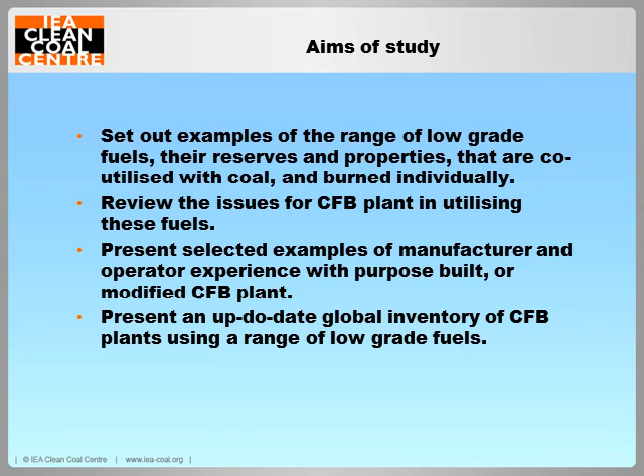So the first question to ask ourselves is, what are these low-grade fuels? Generally speaking, they're characterised by having a recoverable energy content, but one which is lower than the range expressed in the normal fossil fuels, oil, gas and coal. Additionally, they may be very high in inert materials, principally mineral matter and moisture, and this in many cases accounts for their very low as-fired recoverable energy content. Finally, they may have high concentrations of pollutant precursors. Sulphur is a particularly good example of this, but I'd also cite things like vanadium in petroleum coke by way of example.

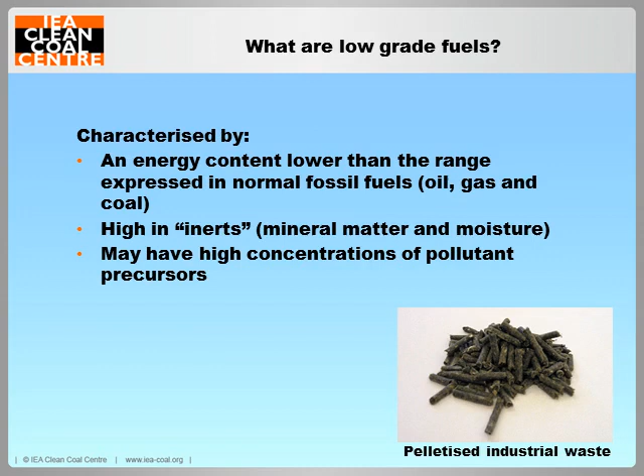So, what are the attractions of low-grade fuels? Primarily financial. They're a resource with recoverable energy. They're available at a relatively low cost. They have an attraction for co-firing with coal, for example, when the price of coal is particularly high, decreasing the overall costs of plant operation. Secondly, certain of these low-grade fuels may reduce emissions when co-fired with coal. This is particularly true of biomass and biomass-derived materials like waste wood, which being CO2 neutral can contribute to reduction in CO2 emissions from a coal-fired plant.

Thirdly, they may be considered as waste materials in their own right, and very often, as a consequence of national taxation policies, these materials can have very high disposal cost. If these materials are used for energy recovery, this cost can be at the very least offset, or in some cases eliminated, by using that waste for energy generation. And finally, they may be useful in clean-up activities. For example, where old coal workings and spoil heaps are being cleaned up. If the material can be used for energy generation, this can contribute positively to the economics of the activity.

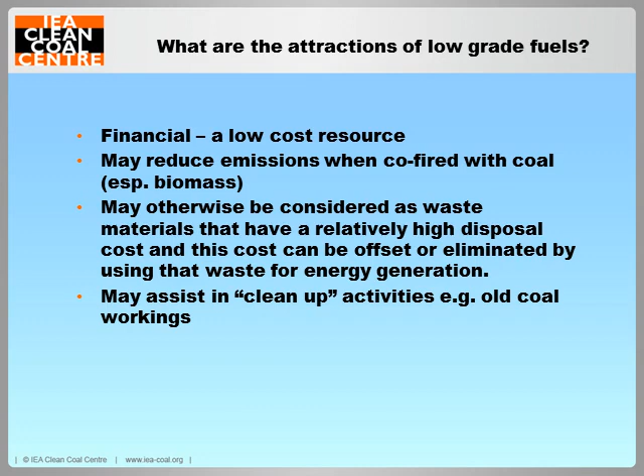Now, this slide just gives a flavour of the very wide range of low-grade fuels that have been evaluated for energy production. They're grouped under these 5 headings: agricultural waste and biomass, industrial waste, municipal waste, wood waste and fossil fuel wastes. The materials range from fairly well-known ones like agricultural waste and biomass, through to quite esoteric ones that arise in very small quantities. But nevertheless, if the producer of the waste can realise monies from their use, this can be very beneficial to the business activity.

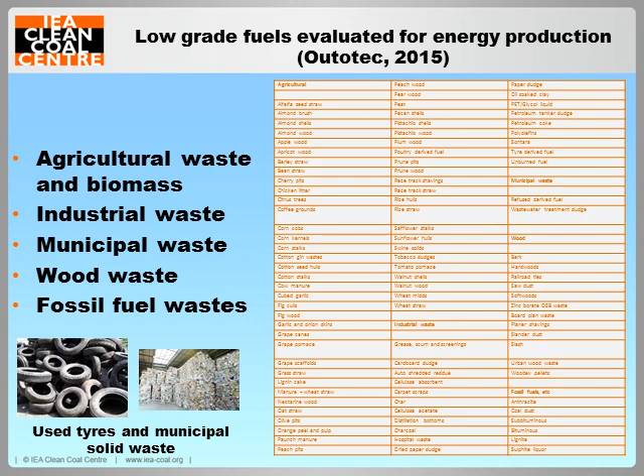Now, in the study, we reviewed the global reserves or annual arisings of these low-grade fuels under these 13 headings: biomass, peat, oil shale, lignite and brown coals, oil sands, coal mill rejects, coal washery rejects, petroleum coke, wood and fibre residue, refuse-derived fuel, plastics, sewage sludge, and high chlorine and high sulphur coals, the latter sometimes being known under the name of battle coals. Now, in some cases, the arisings of these materials can be very significant. For example, I'd cite petroleum coke or pet coke, where production is currently around 170 million tonnes per annum. And in the case of coal washery rejects, recent studies have estimated that up to 60 gigatons are available worldwide. So a very significant resource.

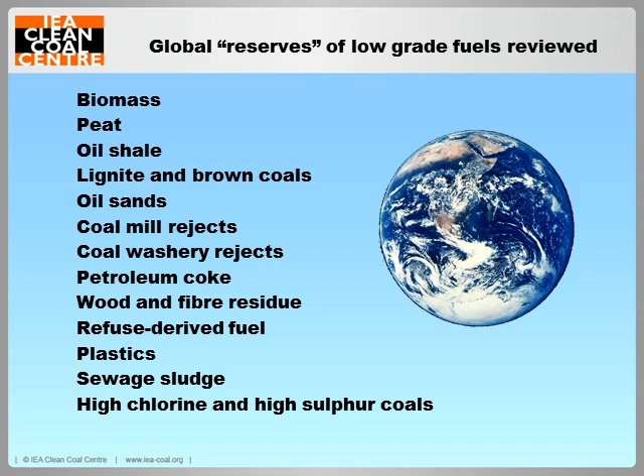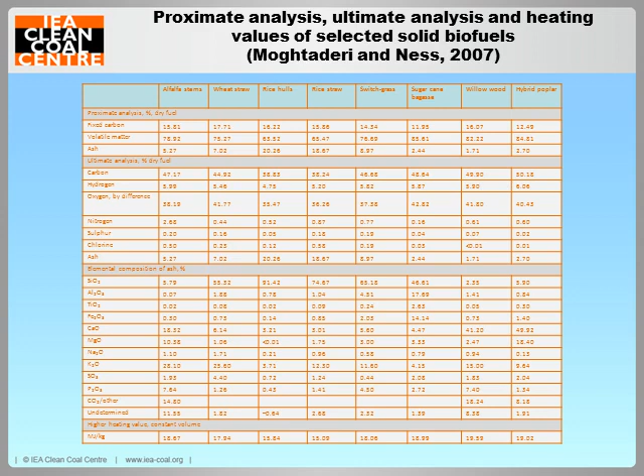Now, this slide just gives a feel for the wide variation in properties within just one category. This lists several types of biomass, and if you just look across the different materials, you can see, for example, that the ash content can vary quite significantly. But of particular importance, the elemental composition can vary very significantly. And this can have implications for plant operation in respect of fouling and slagging issues. Some of the materials are very high in the alkali metals, some 20% there, whereas others are relatively low, and in some cases more coal-like.

Solid fuel or mixture of fuels, along in most cases with limestone for sulphur capture, is introduced into a very large water tube boiler. Now, this contains a bed of inert material which is fluidised by preheated air, and it's in this space that the fuel burns and releases heat to the water tube walls.

The fluidising velocity in the CFBC boilers is sufficient to actually entrain the bed and burning fuel and carry it out of the main boiler, where it's captured by a number of devices, finally a system of cyclones, and then returned to the bed via a separate leg. Hence the circulating aspect of the technology.

Heat is recovered in the usual way with reheat and economizer sections. Steam is used to drive a steam turbine and hence a generator for power production. Heat is further recovered in the air preheater to pre-warm the fluidising air. And finally, on the back end, systems of pollution control can be installed for very low emissions.

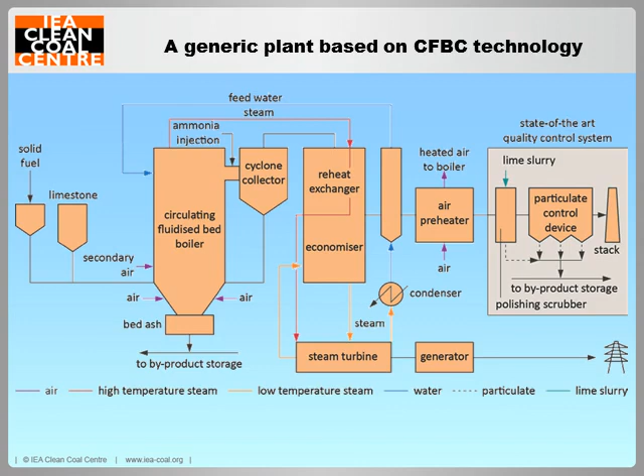Now, CFBC is particularly suited for low-grade fuels for a number of reasons. The large inert bed provides a sort of a heat sink for operation, and this allows it to accommodate a wide range of fuel properties. Building on that, it's possible to change fuels sometimes quite significantly with respect to properties online with minimum disruption to the process.

CFBCs operate typically at 800-850, and this lower combustion temperature reduces the potential problems from fouling and slagging, which can be associated with certain materials. And the low temperatures and the long residence times facilitate emissions control. This is particularly true in the case of sulphur capture with limestone.

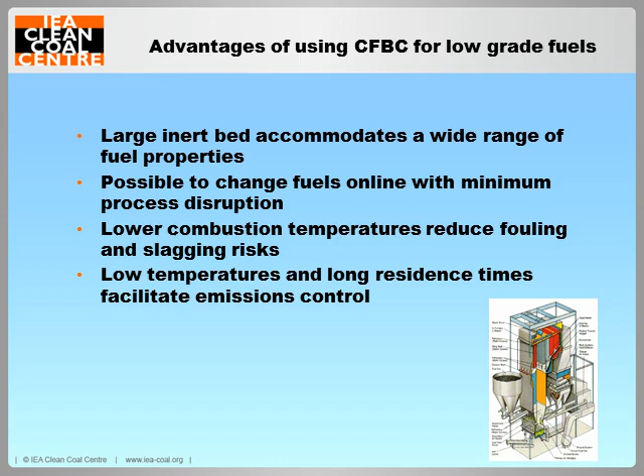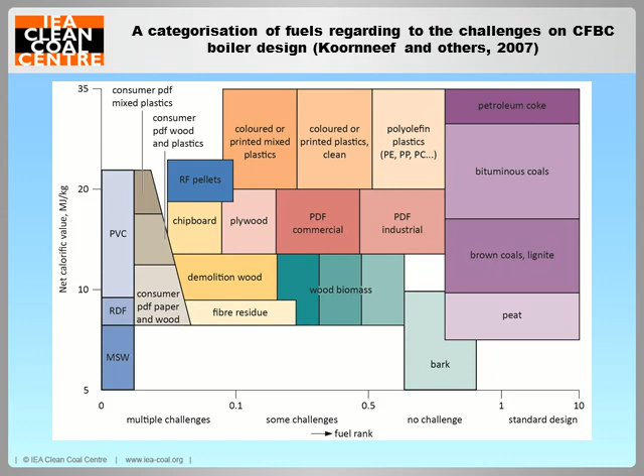Right, just to look at some of the individual challenges from fuels. I mentioned earlier that these fuels can be quite high in moisture, although having said that, the fuel moisture content is generally, unless it's particularly high, not an issue for CFBC utilisation. That's just as well because it can vary quite significantly from a coal, for example, of good quality, having a moisture content between 6 and 7%, going up to certain biomasses which can feature up to 60% moisture. When you reach these highest levels of moisture, it's customary to use a support fuel, which could be coal, gas or oil, to support combustion.

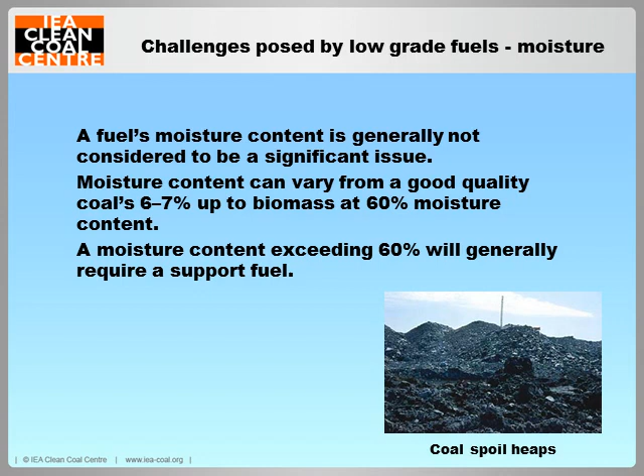The heating value of the fuels can vary very widely, and is almost always linked with the mineral matter and moisture content of the fuel as fired. As we saw previously, high moisture biomass can have an energy content as low as 6.5 megajoules per kilogram as fired, whereas something like petroleum coke can be as high as 32 megajoules per kilogram, which is really sort of comparable or exceeds good quality coal.

When we look at the waste coals, coal washing residues, these can have very low energy contents, as low as 4.5 megajoules per kilogram. But the moisture content is correspondingly low, and the reason for the low heating value is really the dilution by the high mineral matter content.

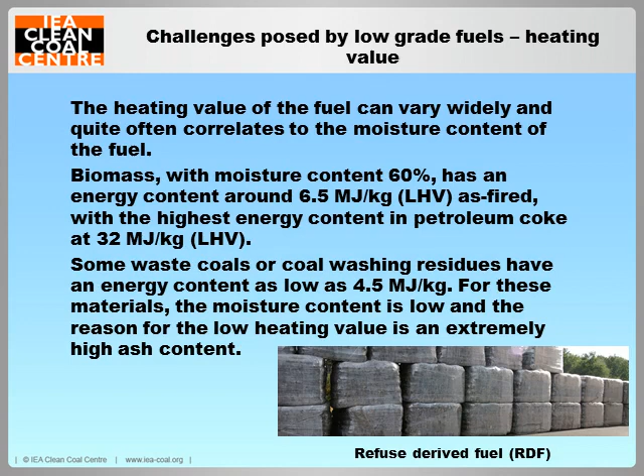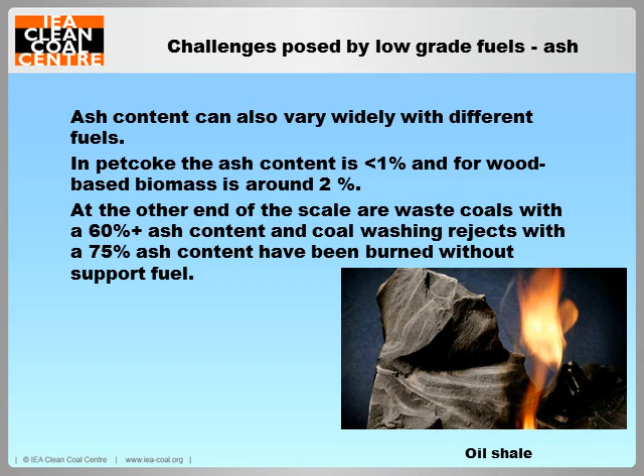The mineral matter or ash content can vary widely, going from a good example, petroleum coke, pet coke. The ash content is typically less than 1%. Wood-based biomass, also very low ash, about 2%. But as we saw earlier, the waste coals can have very high ash content, 60-75%. But because the moisture content tends to be relatively low on these, they can still be burned without support fuel.

Sulphur and chlorine contents can be an issue in these materials, and again, wood-based biomass, very low sulphur content, but pet coke can contain 6-8% sulphur, and as we'll see later, some of the poor quality lignites can have sulphur contents of as high as 13%, which pose specific issues.

Chlorine content is also an issue. This can arise in certain coal-derived materials, but the greatest challenges are provided in the refuse-derived and municipal solid waste-derived materials, where the chlorine content can frequently exceed 1%, with implications for deposition and corrosion.

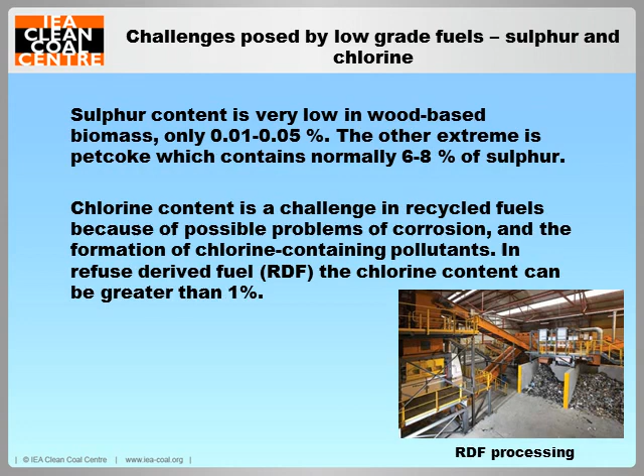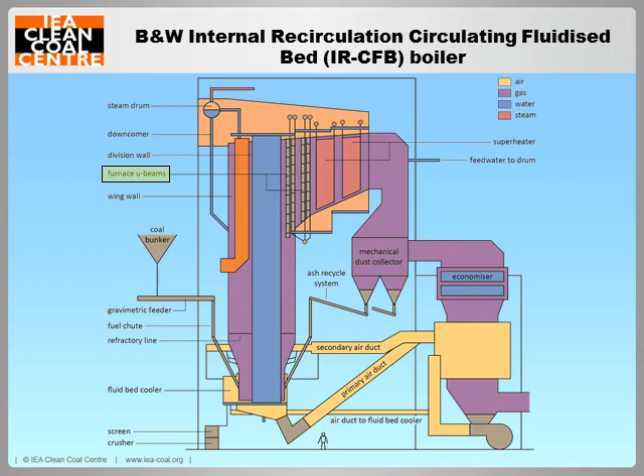Now, the boilers are noted for having a two-stage solid separator. This is the process by which the bed material, which is circulating, is captured and returned to the main boiler. And the primary mechanism for this is through impaction on a series of devices known as U-beams, which are located at the furnace exit. And these collect the bulk of the solids, 95 to 97%, and they are then returned to the furnace by gravity. Material which escapes the U-beam collection passes into a multi-cyclone dust collector in the lower temperature region of the boiler, and here the remaining ash is collected and again returned to the main boiler.

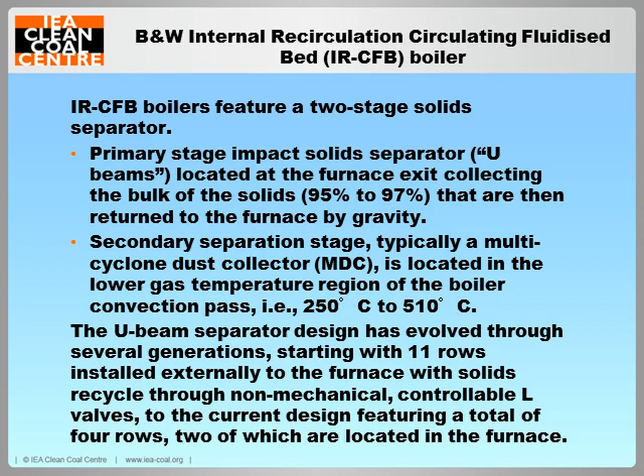Now, B&W's experience on the range of fuels has resulted in evolution of the U-beam separator design so that this degree of capture can be achieved efficiently with a range of fuels with additional benefits to furnace operation. If we look on this slide, we have the original generation, which featured, I think it's 11 rows, which were actually outside the main furnace, and an associated solids collection hopper for return of material. Evolution of this design led to the introduction of U-beams actually in the furnace, where material would drop directly back into the bed, but material which passes that is again collected in the hopper. And then further evolution of the design led to the introduction of a sort of dogleg slope on the furnace exit, fewer U-beams, but very efficient collection, returning a very high concentration of bed material back into the furnace.

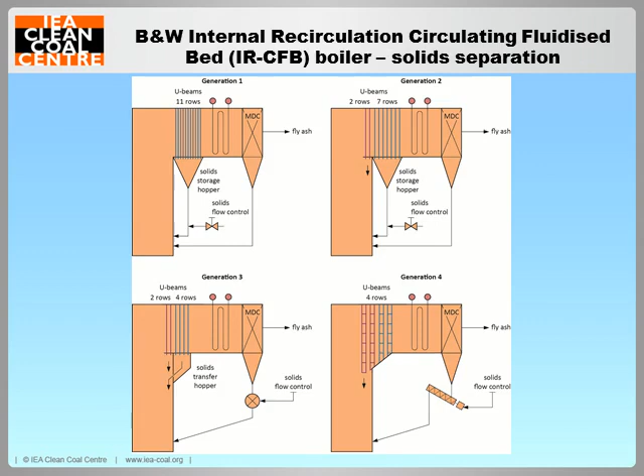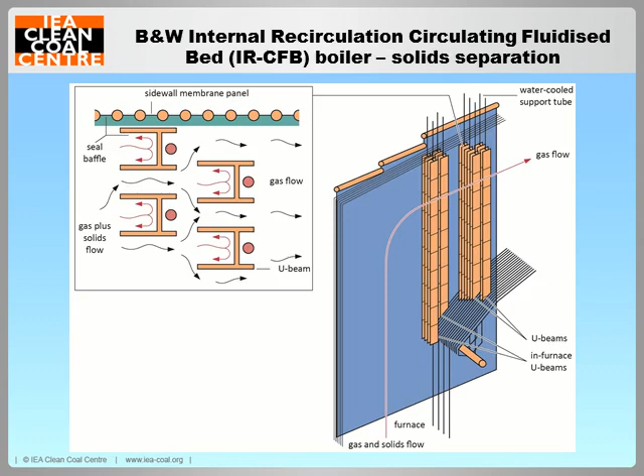This slide shows that process in a little bit more detail, where you can see the structure of the U-beams, where impaction reduces velocity of elutriated material, which then drops down back into the main part of the furnace. We have a set of U-beams actually in the furnace, and the backup second set lying a little way behind that. Another area of improvement has been the minimisation of refractory within the boiler. This has benefits from two standpoints. If the refractory is minimised, then the warm-up time of the boiler is reduced, and less refractory means less surface available for the potential growth of deposits, which can impede operation.

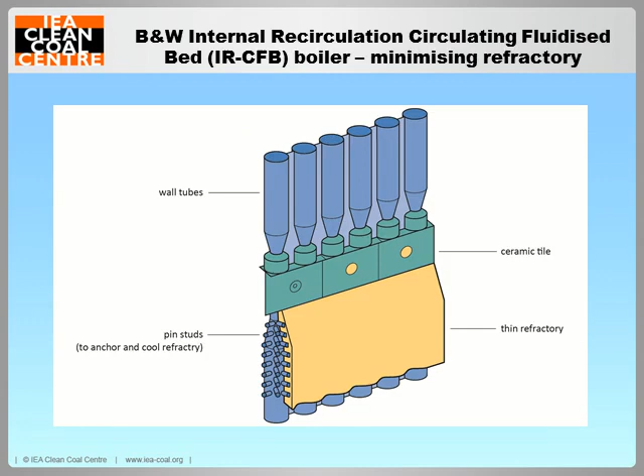So, summarising the lessons learnt from this exercise, the U-beam evolution design gives higher solids collection efficiency, better control of furnace temperature, the auxiliary power requirements were found to reduce, more uniform gas flow throughout the boiler, reliable operation of the solid separation system, and the reduced refractory in the boiler has reduced startup time of the CFB. The CFB operates with a better dynamic load change and has a wide turn-down ratio of about 5:1. And there are several examples of this type of development in the bulk of the study, if you'd like to take a look.

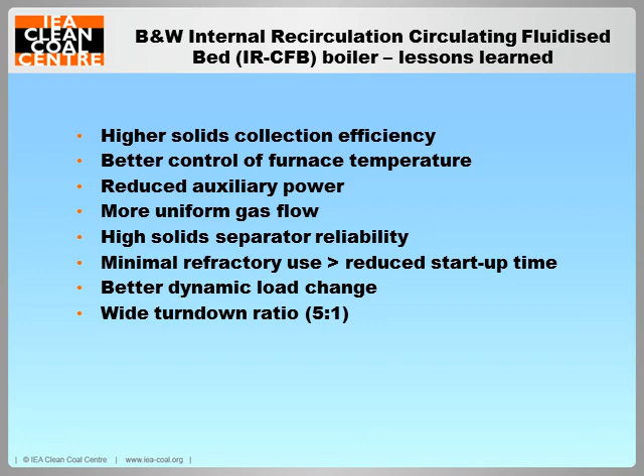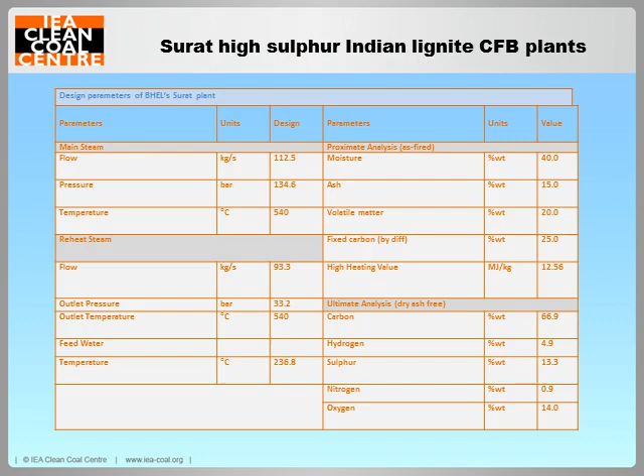Second example, this is a CFB plant which was constructed and commissioned to utilise the Surat high sulphur Indian lignite. This is a particularly difficult fuel which has a high sulphur content of over 13% and requires a significant concentration of limestone for sulphur capture. Now, the operating experience of using this high sulphur lignite in the CFB, two problems really. Ash-related blockages were occurring at the cyclone, particularly at low load, where limestone, which had been calcined, was recarbonating and blocking up the entrance to the multi-cell cyclone system. Additionally, in the boiler back pass, deposition was very rapid, occurring on the water tube walls there, and this was impeding the passage of flue gas, causing back pressure and operational difficulties.

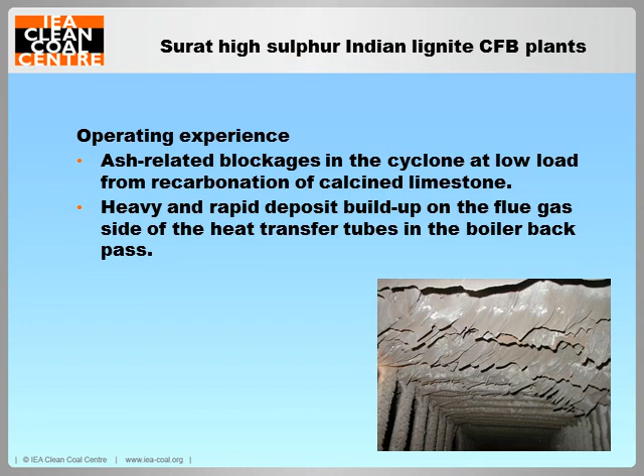To tackle the cyclone deposits, a program of work was initiated by the operators, checking the limestone feed size continuously with additional sampling, and optimizing the feeder size by fitting blanking plates to certain of the feed cells to make sure that the flow is consistent. The operating procedure of the plant was revised to maintain the higher combustor temperatures before commencing limestone addition to try and minimize this effect. And finally, the incorporation of an air pulsing system at the junction of the cyclone and standpipe was found to be effective, disturbing the deposits at a very early stage.

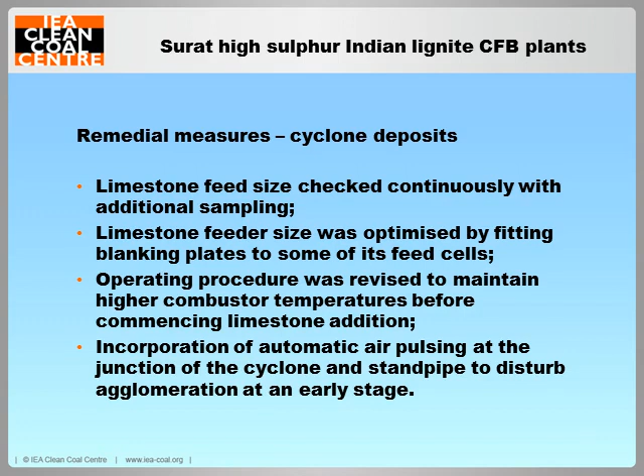For the backpass deposits, a series of investigations using probes determined the rate and location of build-up, and a series of high-pressure soot blowers were introduced into this part of the boiler, and a fluidisation arrangement for smooth removal of ash falling into the ash hoppers to ensure that there wasn't really enough material for deposits to become established. Now, the outcome of both of these measures has been to improve full load operation, and limestone could be added sufficient to achieve a sulphur capture of more than 98%, which is quite impressive considering the very high sulphur content of the lignite fuel.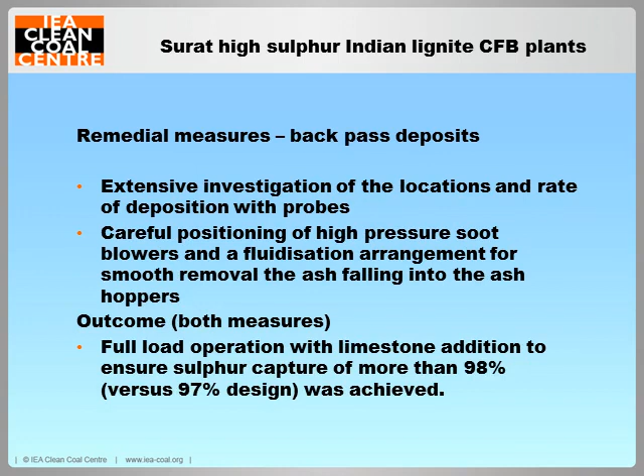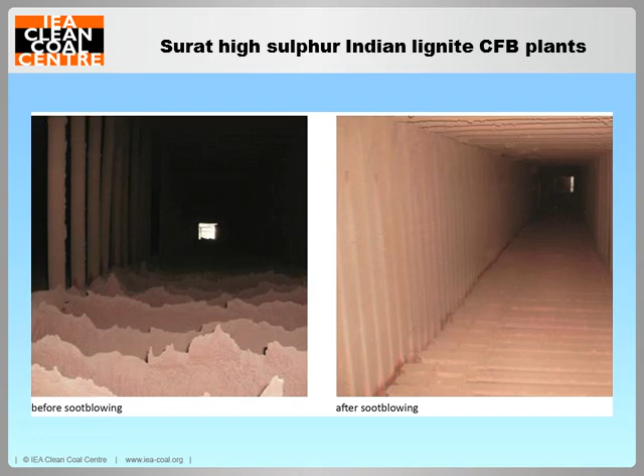This slide just shows the deposits that were occurring in the back pass of the boiler. There's a slide on the left before the introduction of soot blowers, and on the right after soot blowers have been introduced and operated, a nice clean flue gas path.

And finally, the global inventory of CFB plants, which was carried out, identified a little over 300 CFBC plants that were burning or co-combusting low-grade fuels, either alone or in combination with coal. Plants located in 33 countries, and the inventory gives details of the units, including the size, the commissioning date, location, plant owner, the fuel types that have been used, steam cycle conditions, and the pollution control equipment that's installed.

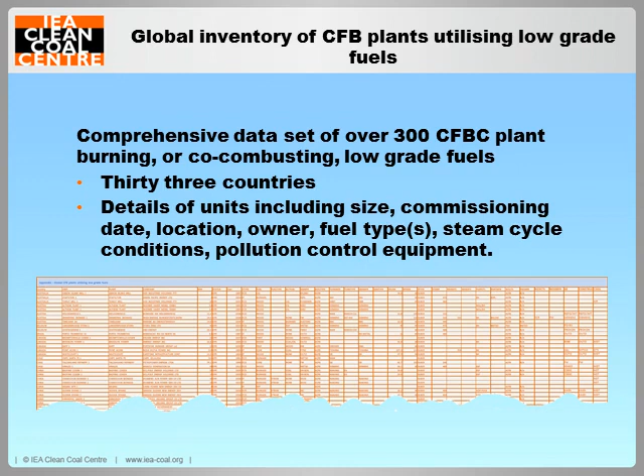Right, the key messages coming out of this study are summarised in the following slides. First of all, globally, there's a very significant resource which exists in the form of these low-value or low-grade fuels, and these are a valuable resource that is being increasingly exploited in combination with coal or fired separately.

However, the properties of these low-value fuels can vary very widely depending on their origin. They can be high in inert components, mineral and water. Others contain elements which are deleterious to combustion technology and may indeed be pollutant precursors. But despite these drawbacks, the economic viability of their use has driven an increased utilisation of these low-grade fuels, and we believe this trend is likely to continue for the foreseeable future.

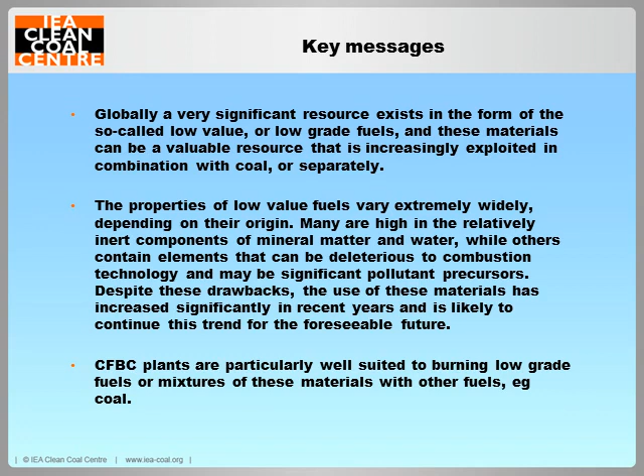We've seen how the CFBC plants are particularly well suited to burning the low-grade fuels or mixtures of these fuels with coal, for example, and other fuels. Having said that, it's not without difficulty, and fuel properties can be a challenge to the design and operation of CFB plants through low inherent energy content or the high inert material, plus components that can damage the boiler.

We've seen examples of the way in which ash can be captured in the B&W boilers. We've seen problems associated with the high sulphur content of lignites. Other issues might include corrosion from the high chlorine materials that are refuse derived, and these have all fed into the evolution of successful CFB designs. So it's fair to say that the CFB plants have risen to the challenge of using these fuels, and they are a really effective way of making the most of what would otherwise be problem wastes with their own disposal issues.

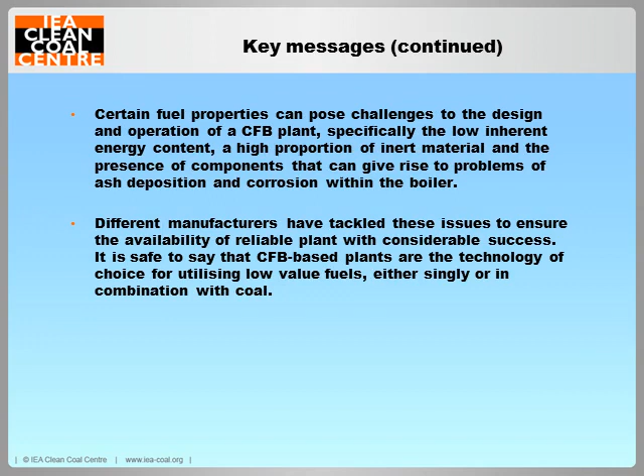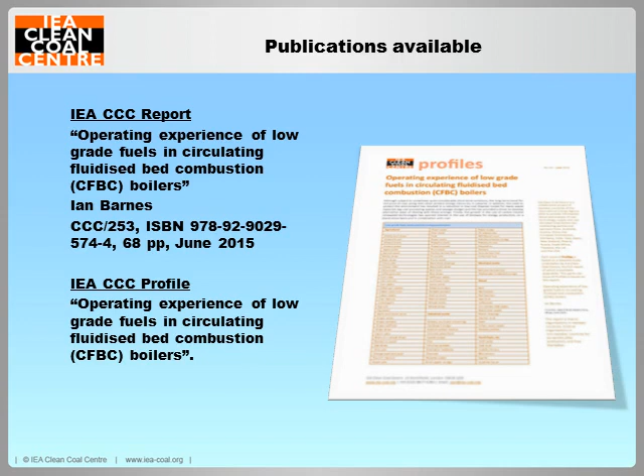Now, the publications that are associated with this webinar are two. There's the main IEA Clean Coal Centre report, which is available for download on the website, as I mentioned earlier. And there's also an executive summary in the form of the IEA Clean Coal Centre profile, which gives a two-page summary of the main points of the work.